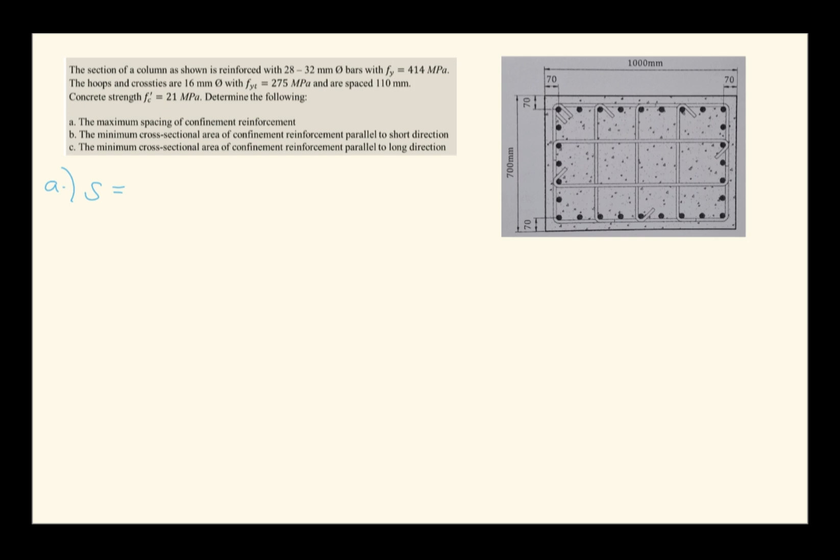We then have the transverse spacing as based from the first criterion, 1/4 of the least column dimension. So we have in here 175 mm. The second criterion is about multiplying 6 with the least longitudinal bar diameter, which in this case we only have one diameter, which is 32 mm. 6 times 32. This is 192 mm. And the last criterion

needs solving S sub O, which is equal to 100 plus 350 minus hx divided by 3. Okay? And we have to remember that whatever value computed in So, it should not exceed 150 mm, and it should not be less than 100 mm. So for instance, we got a value greater than 150, then we have to take the maximum value, which is 150. On the other hand, if we got a value that is less than 100, then we have to take the value 100 mm, right?

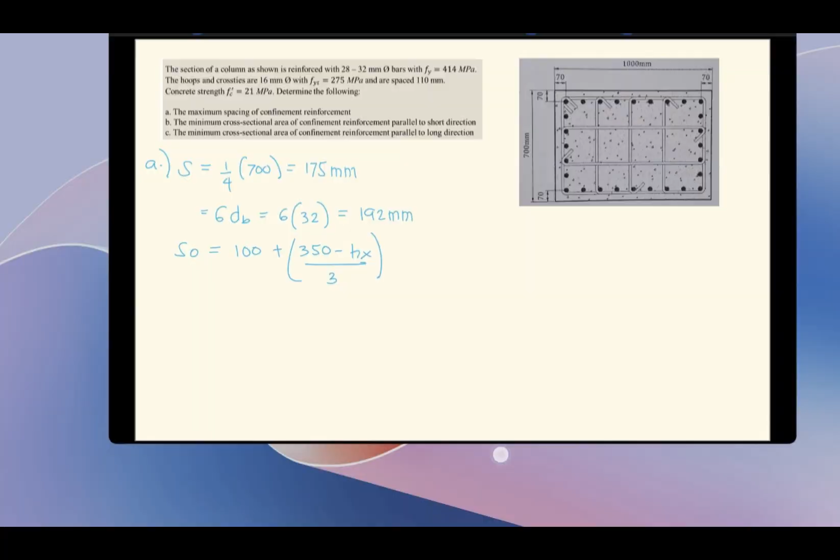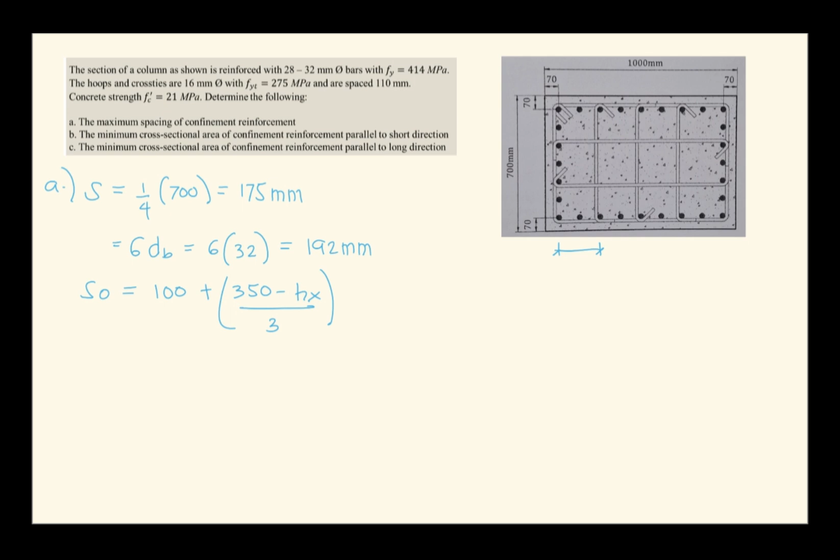Okay, so we have this. So we have 1000 minus 140, divided by, so 1, 2, 3, 4, divided by 4 spaces. So this is equal to 215 mm, which is basically the same here, right? How about in the other direction?

So that will be equal to 700 minus 70 minus 70. That will give us 560 divided by how many spaces? 1, 2, 3, divided by 3. So this is equal to 186.67. Obviously 215 is greater than 186, so we'll use 215 as hx. Okay, 350 minus 215 divided by 3 plus 100. This is equal to 145 mm.

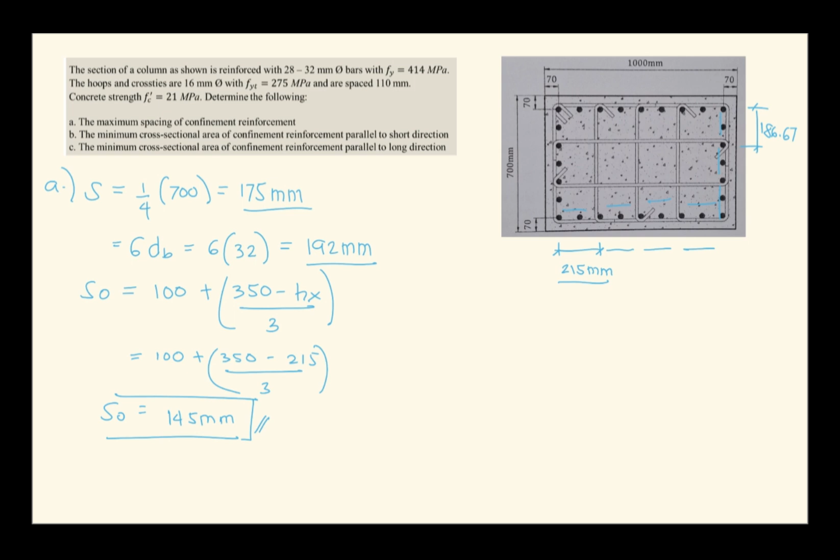mm. Okay, this is the maximum spacing, and the actual spacing of the confinement reinforcement or the transverse reinforcement is 110. Okay, so 110 is less than 145, so it's safe to say that we have a good spacing between transverse reinforcement, right?

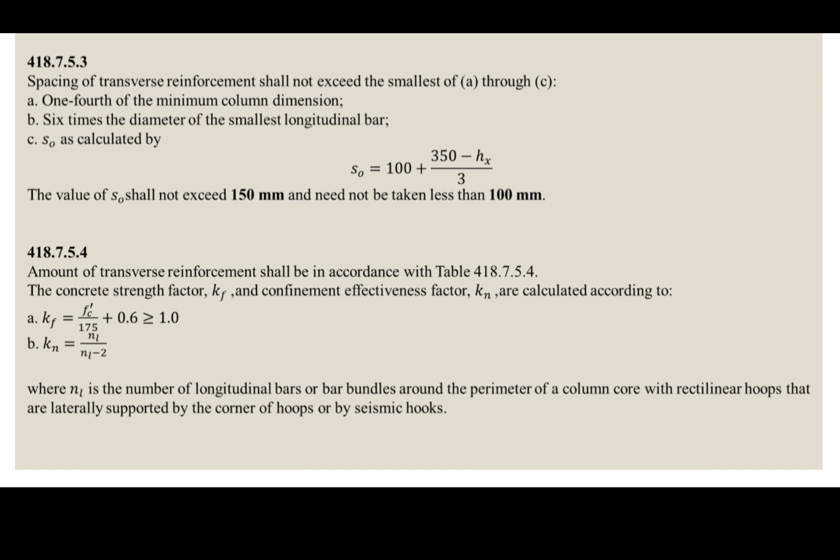In letter B, we are asked of the minimum cross-sectional area of confinement reinforcement parallel to the short direction. Okay, so it is parallel to the 700 mm dimension. To satisfy what is required in letter B, we have to go to the NSCP 2015 provision dealing with this, and it can be found in section 418.7.5.4. It says in here that the amount of transverse reinforcement shall be in accordance with table 418.7.5.4. Okay, and this is that table.

We'll be focusing on the first row, since this deals with rectilinear hoops, as in the case in our example. Also we have to note that fc prime is equal to 21 megapascals, which is way less than 70 megapascals. Hence, the applicable expression for the minimum confinement reinforcement will be whichever is greater between this expression in A and B, right? So whichever is greater here in A and B will be the minimum Ash, or the minimum transverse reinforcement, right?

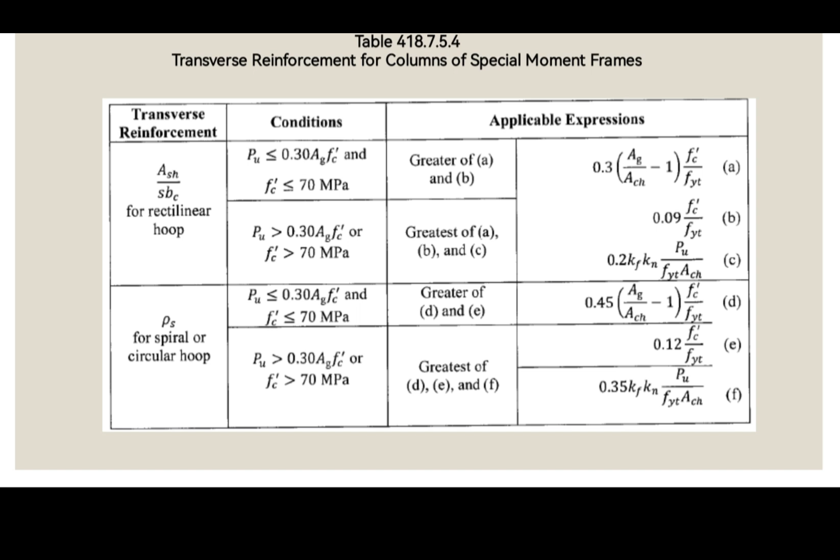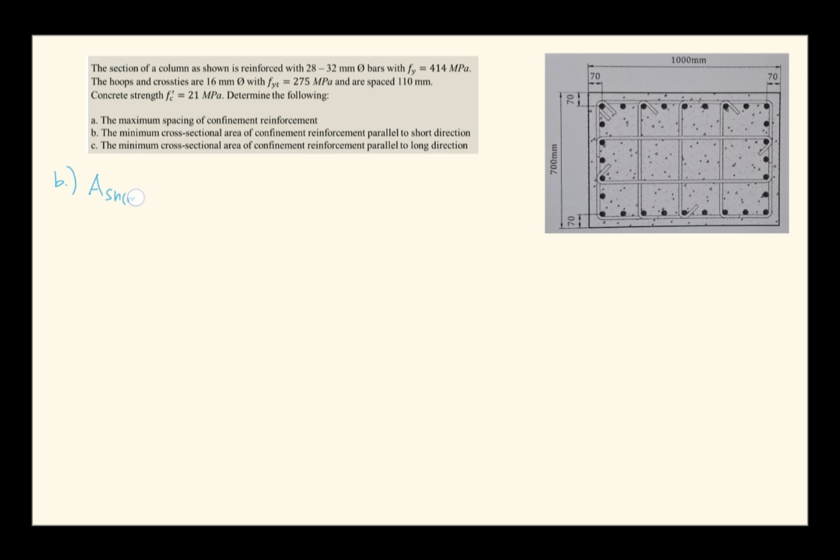Okay, so we have ASH minimum divided by the spacing multiplied by B sub C equal to 0.3 times the quantity A sub G over A sub CH minus 1, okay, or ASH minimum divided by S BC equal to 0.09 Fc prime over FYT. Okay, FYT is the yield strength of the transverse reinforcement. Multiply this quantity with Fc prime divided by FYT.

Okay, A sub G is the gross area of the column. A sub CH, this is the cross-sectional area of a member measured to the outside edges of transverse reinforcement. Okay, measured from the outside edges of transverse reinforcement. Okay, that is A sub CH. Okay, and that

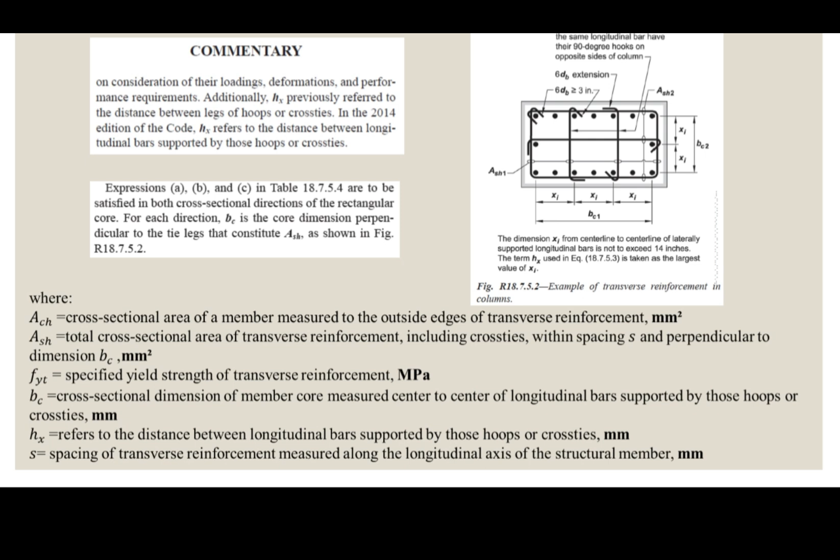So it will be ASH minimum divided by 110 mm multiplied by BC, which in this case is equal to 1000 minus 140. Okay, it says in here that BC is measured center to center of longitudinal bars, right? So we have 1000 minus 70 minus 70. Okay, that is equal to 860 mm.

Equal to 0.3 multiplied by 700 times 1000 divided by A sub CH, in which, as defined, A sub CH is the area of the concrete core measured from outside of the transverse reinforcement. Okay, so that would be 860 plus 16 plus 16, because the longitudinal diameter is 32 mm. Okay, and BC is center to center of the longitudinal bars, and so we have to add 16 and another 16, considering both sides of these longitudinal bars.

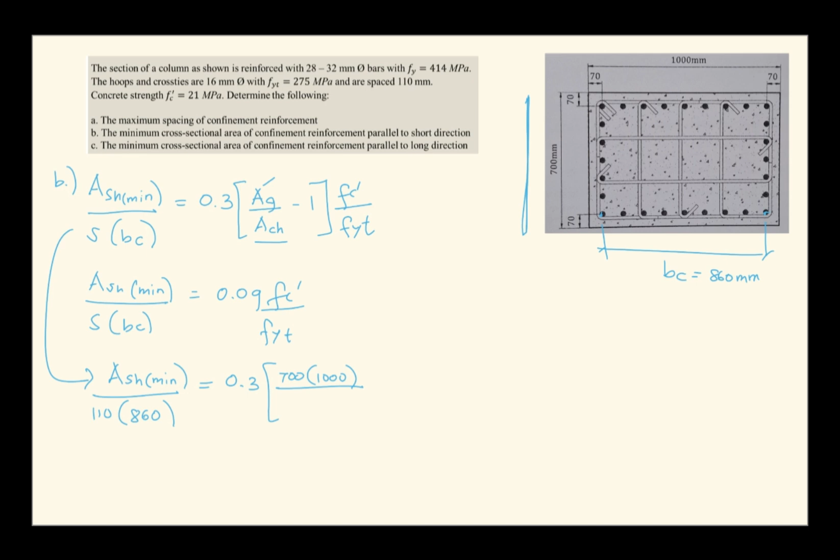Okay, also we have to add another 16 and 16 to account for the distance, which is the diameter of the transverse reinforcement as given in the problem. So in here we have 924 mm. And in the short direction, it will be 700 minus 140. That is 70 and 70. Okay, plus 16 plus 16, constituting the distance from the center of this longitudinal bar as well as this longitudinal bar, plus another 16 and 16 for the distance covered by the diameter of both transverse reinforcement. Okay, so that is 624 mm.

So we have in here as our A sub CH 624 by 924, minus 1, multiplied by 21 divided by 275. This will give us 463.92 mm squared. Whereas here, in the second criterion, we have ASH minimum divided by 110 by BC, which is 860, equals 0.09, 21, 275. This will give us 650.16 mm squared. It is the greater between the two, which will become our reference for minimum.

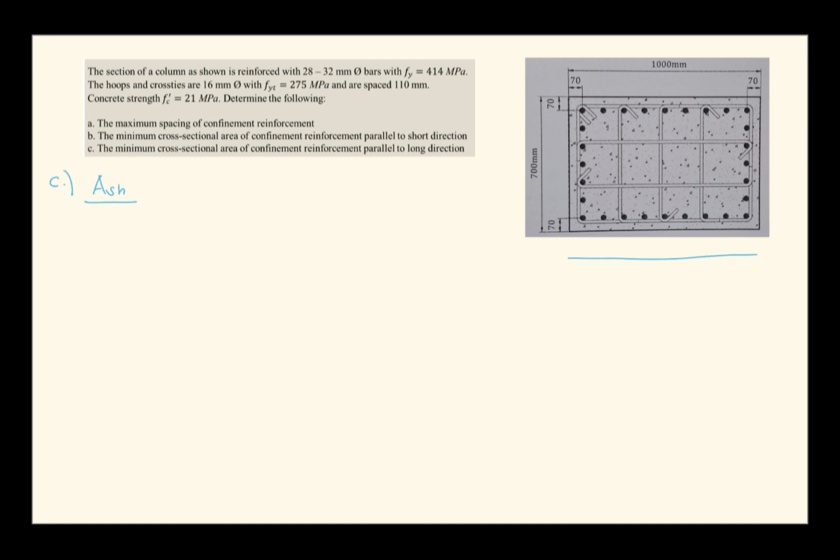Okay, we still have to determine the adequacy of transverse reinforcement provided in the other direction, parallel to the long direction. Similarly, to satisfy the requirement in item C, which is the cross-sectional area of confinement reinforcement parallel to the long direction. Okay, so we write the formula as equal to this divided by S, which is 110, BC. If we are considering this direction, the corresponding BC will be perpendicular to this, okay, this distance rather, and that is equal to this vertical distance. So it is simply 700 minus 70 minus 70. So 560 equal to 0.3.

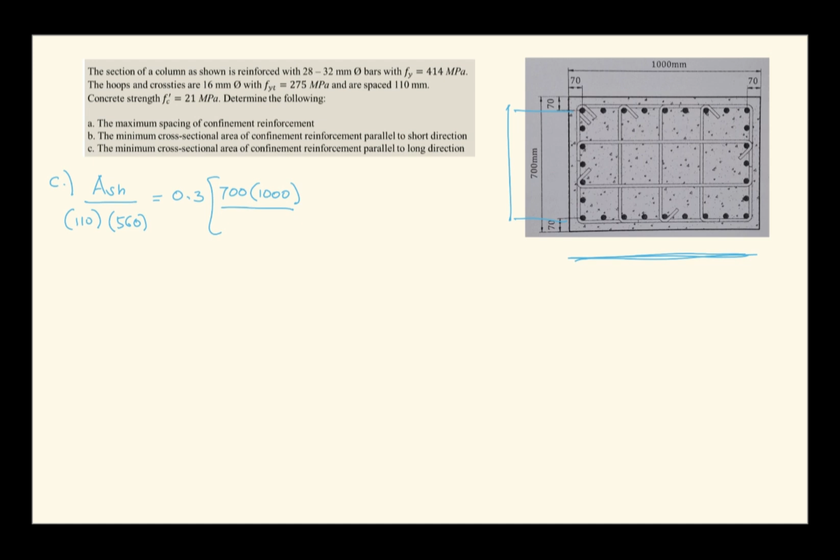Okay, 700 times 1000, that's the gross area, divided by 924 and 624, minus 1, FC prime as 21 divided by 275 as FYT. This is equal to 302.09 mm squared. By the way, this is our 560 mm. The other criterion is involving this equation. We have in here 0.09, 21 divided by 275, and ASH will be divided by 110 multiplied by 560. We'll get a value of 423.36 mm squared. It is 423 that is greater between the two values, which will be compared with the provided transverse reinforcement area.

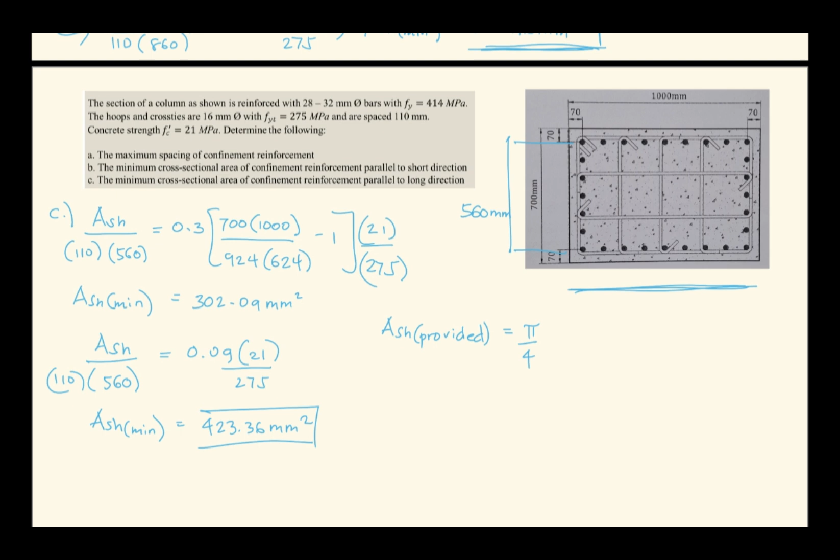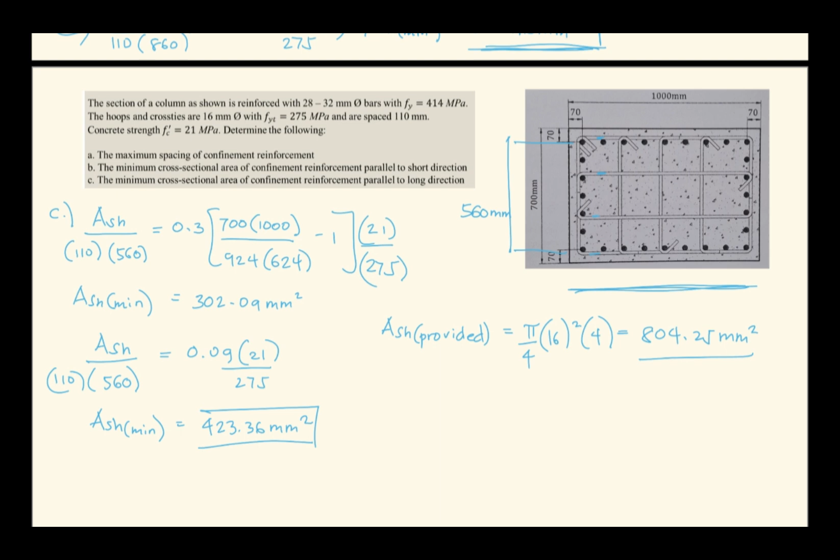This is equal to the area of the reinforcement in this direction. So we have 1, 2, 3, and 4. Okay. 16, 4. It's equal to 804.25 mm squared, which is greater than 423. Hence we say that the transverse reinforcement in the direction which is parallel to the long direction is adequate also. Okay.